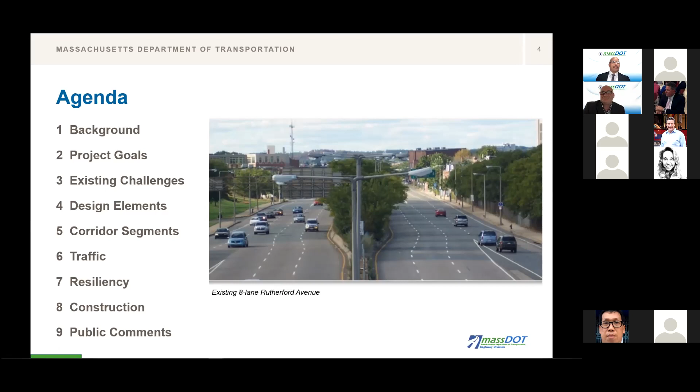The notice of the public hearing appeared in the Charlestown Patriot Bridge on June 11th and 18th, and in the Boston Globe on June 9th and 16th.

The purpose of this public hearing is to provide the public with information about the proposed reconstruction of Rutherford Avenue. The roadway corridor, as some of you may know, is failing, and the corresponding bridges are considered to some degree deficient. Our main concern, and above all, is safety. Significant improvements to the corridor are anticipated once the project has been completed.

The project is currently at the 25% design stage. The project needs to be advanced in order for it not to lose its window of opportunity. The advertisement date for construction procurement is currently in the first quarter of 2023. Construction should take about 4 seasons. The current construction cost is approximately $177 million. In order for us to advertise the project, we need to secure environmental permits and right-of-way before the first quarter of 2023.

80% of the cost will be funded by the Federal Highway Administration. The state of Massachusetts will fund the remaining 20%. And now Craig Sheehan will explain the right-of-way procedure.

Thank you, Alan. When the Commonwealth, acting through its Massachusetts Department of Transportation Highway Division, indicated it would accept this project for funding, your municipality accepted certain responsibilities. One of those responsibilities is acquiring all the necessary rights in private and public lands for the design, construction, and implementation of this project. My function as community compliance officer assigned to the project is to review and recommend procedures that your municipality may use in acquiring these rights. Procedures used must comply with both federal and state regulations.

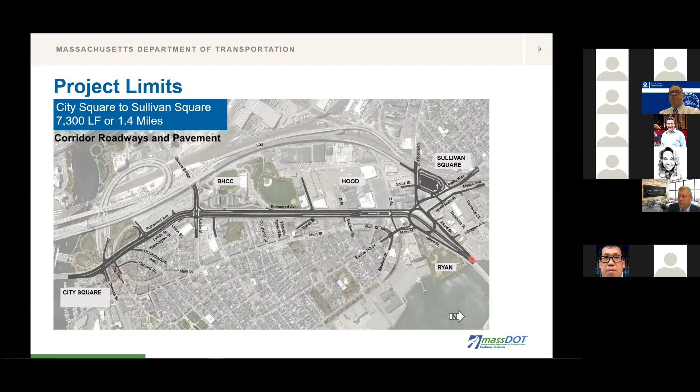So what is it that we want to accomplish? We've been talking about the project goals for years, as Bill has mentioned, and the number one goal is to improve safety for all users. We also want to improve pedestrian, bicycle, and transit mobility, decrease traffic congestion, and try to protect the neighborhood from cut-through traffic.

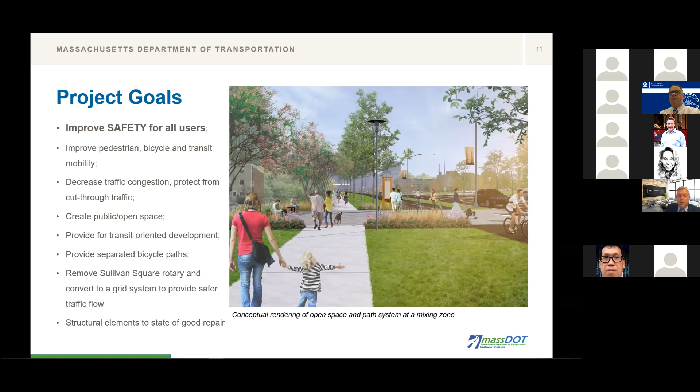Create some open space and transit-oriented development parcels. We're going to be providing separate bicycle paths. And another goal is to remove the Sullivan Square rotary and convert to a more traditional city street grid system. Also for the structural elements, to bring those up to a state of good repair.

Some of the existing challenges on the corridor have been identified through an independent road safety audit for the traffic aspect of the project. This includes things such as traffic congestion and confusing lane designations, poor pavement and sidewalk surface conditions. Signal equipment is old, pedestrian and bicycle accommodations are lacking, high speed of traffic on the corridor, and also transit is poorly supported, as well as lighting and traffic signage.

Before I get into showing you the plan, just to touch upon traffic data a little bit, we collected traffic data back in 2017, and then some supplemental data in 2019 after the casino was opened. We know that during this pandemic period, there's been quite a fluctuation of traffic from 0 and now back to, I guess, 100%. According to the Globe article the other day, traffic is back to its pre-pandemic levels.

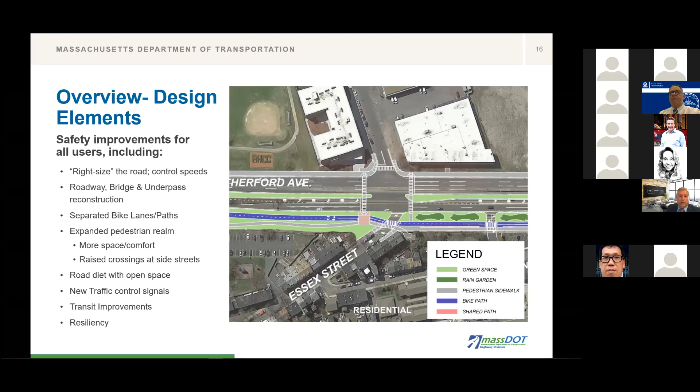Getting into the different corridor segments, I'm going to start down here at City Square. We are matching up to the North Washington Street project, which is currently under construction. As I mentioned, with the traffic volumes, we see that there's less traffic in the northbound direction, so that is where we're taking advantage of that with the overcapacity of lanes that are out there today, and we can implement the road diet on the northbound side.

So where I have my pointer now, this is where we're going to shrink the pavement and implement the separated two-way bike path, separate sidewalks. We're going to raise the intersection at the cross streets and driveways so that they're sidewalk level to make it safer for pedestrians crossing. And also here we've got in red, these are the bus queue jump lanes.

This lane here at City Square extends back to the Tobin Bridge ramp, and that's where the Route 111 MBTA bus comes down into the corridor. So we can add this lane and then match into the lane on the North Washington Street Bridge. With all ramps on this project, such as this one at I-93 southbound, we're going to squeeze the width of the ramp as much as we can so that we can expand the pedestrian space.

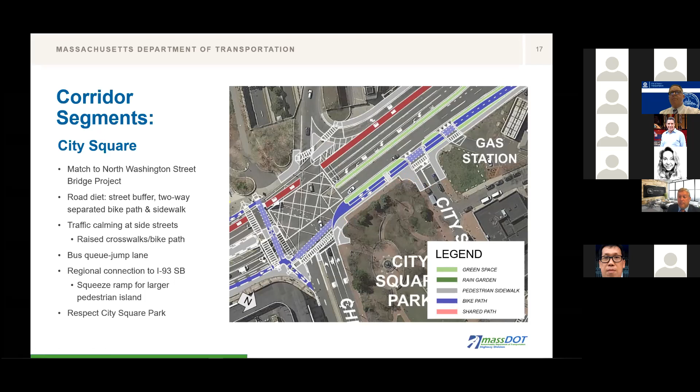Coming up here to the Tobin ramps, we are adding a new crosswalk on the south side here. This is a really nice crosswalk because it can operate with no conflicts from vehicles. So when the off ramp has the green light, pedestrians can cross at the same time, totally protected with no conflicts.

We're adding this bus queue jump lane to the off ramp, which again benefits the Route 111 bus. And then on the northbound side, you can see we continue the road diet northerly with the separated bike lanes and the sidewalk. We might also have an opportunity to make a pedestrian connection to Lynde Street because there's this triangular piece of land owned by the BPDA that they're going to give to Public Works for the project.

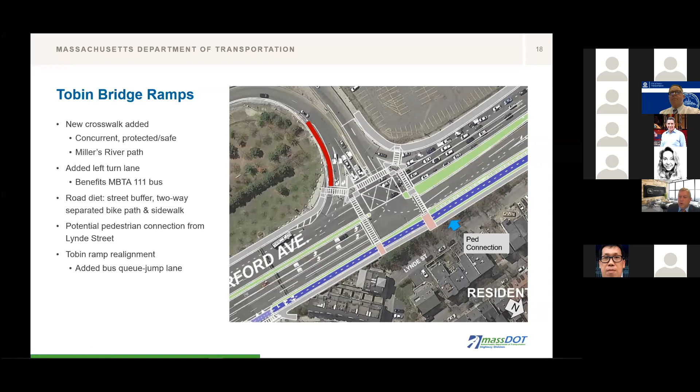Let's move on to the next intersection. Here we have the Austin Street and Gilmore Bridge connection.

What we're doing here is a significant narrowing of the underpass. Today it's a 6-lane underpass, and we're going to narrow it down to just 3 lanes. What we gain is helpful for the pedestrian and bicycle realm. We can shift the whole roadway over and gain nice sidewalk space at the corners of Austin Street for the path system.

This is like a traffic calming element with sharper turns here, so cars make the turns slower. We gain a significant amount of sidewalk space where the pedestrian bridge is today. We're planning for a brand new bridge that's wider, with appropriately lengthed ramps so they meet ADA guidelines - it's not too steep.

As we continue across the intersection, we're going to remove the southbound U-turn and dedicate that space for sidewalk. We're also going to squeeze the ramps as much as we can to increase the pedestrian islands, including on the community college side. One thing we're looking to do when we build the new bridge is have a rampway down to the city sidewalk, so you're not just up on the plaza for the college.

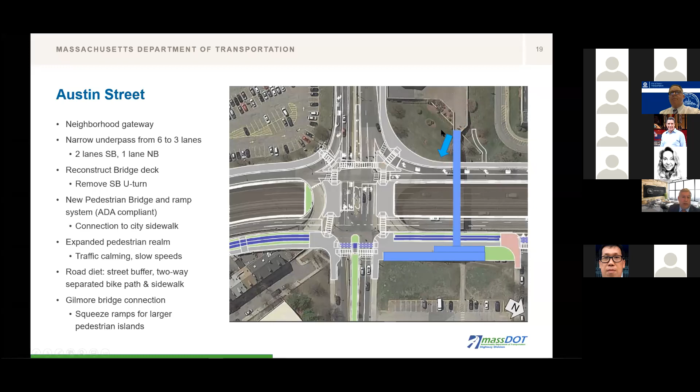Next slide here is at the community college driveway. This is a spot where we're creating a brand new intersection, breaking through the median barrier on Rutherford Ave to create a new full access intersection for the college driveway. We're also gaining crosswalks and safe crossings, actually stitching the neighborhood together so you can cross the road - a huge benefit for people trying to get to the community college.

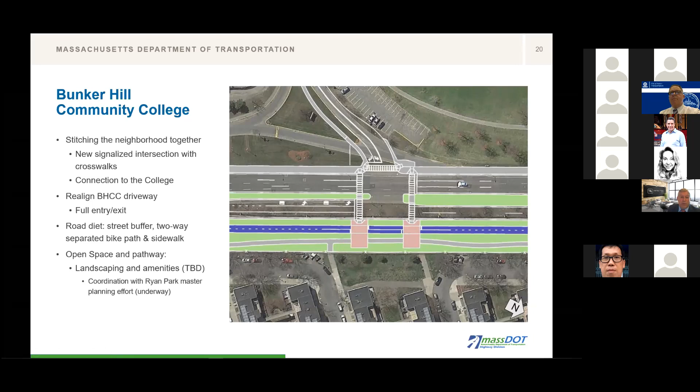We've again got the road diet and the open space that we gain from all the lane narrowing we've done. We're getting about 55 feet of width here, which is really tremendous.

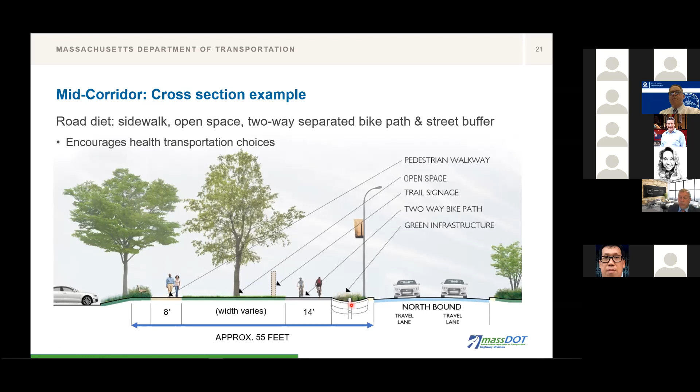That little section of open space is represented here in this cross-sectional diagram. Again, it's about 55 feet wide. We can have a separate sidewalk, open space area, separated bike lanes, and a buffer to the street, which could potentially be bioswales or some green infrastructure.

Moving north of that, we get to Essex Street and the Hood Business Park, where we're again creating 2 new signalized intersections, similar to before, with crosswalks and open space. The total amount of open space from about West School Street northerly to about Baldwin Street is almost 3 acres - we're at 2 3/4 acres of open space. Tremendous benefit there, with the ability to put maybe more green infrastructure in place.

We're going to be doing Boston Water and Sewer work. They have some combined sewer here, so we're separating that, which is a nice health benefit as well. As far as the underpass goes, we are reducing the footprint by about 800 feet in this area. That old section of overhead structure still in place is the portal to get into the underpass, but there's a long sloped section to get down there, so we're going to be shrinking that by 800 feet.

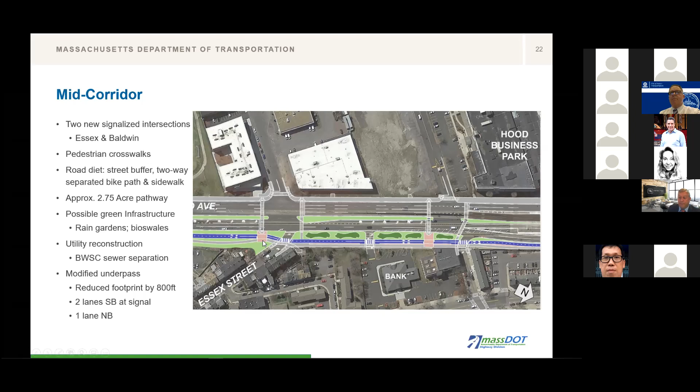Coming up here to Sullivan Square, we are removing the rotary, and what we're showing is a street grid of regular intersections. One thing we're doing from a traffic operations point of view is Rutherford Avenue will be continued and matched up to Maffa Way, so Maffa Way will become a 2-way street. A lot of the traffic on Rutherford Avenue wants to go northbound to Assembly Square to get to the I-93 ramps, so making this a straight through movement takes away a lot of confusion, and we gain a lot of efficiency from a traffic perspective.

When we plan to deck over the underpass, we create this nice open space area, about 1.5 acres, which provides a direct connection from the neighborhood and the Schrafft Center across the old rotary to the T station. That's one of the goals achieved right there - better connectivity.

When we do this, we're also looking to create some transit-oriented development parcels for the future. These were the parking areas that are there today, but when we shift the road over, we adjust where those are located. For the Main Street connection here to the neighborhood, we're actually cutting through a little bit of the MBTA property, so the city's been working on coordinating with the MBTA and acquiring that land.

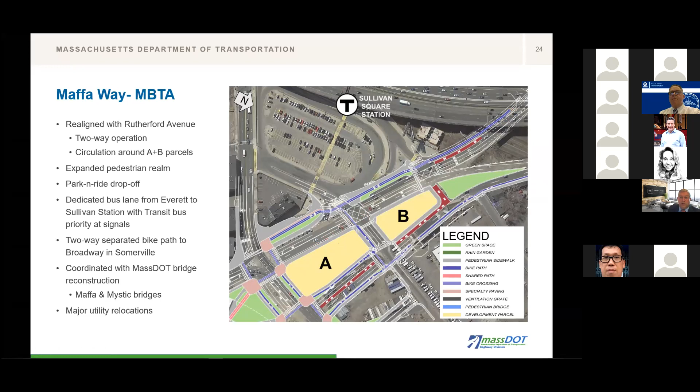In addition, when we discontinue the roadway from the old rotary, we end up with about 3/4 of an acre that we can give back to Ryan Playground. So we have the opportunity to expand Ryan Playground. We're constructing a new driveway exit onto Main Street, as well as the one that's on Alfred Street. And the Parks Department is undergoing a master plan right now for the playground, so they're going to consider this new space, as well as the connectivity to Sullivan Square Park.

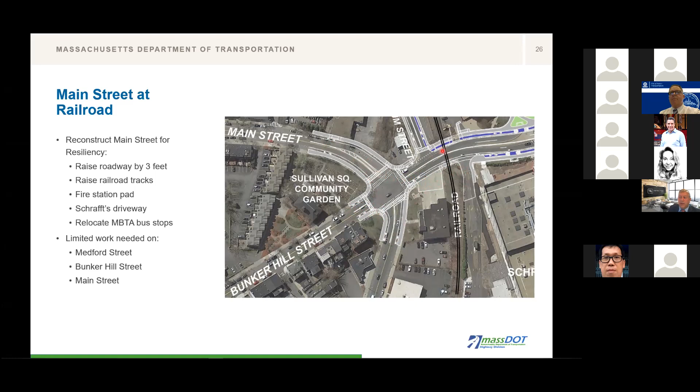So just to recap a little bit for pedestrians and bicycles on all the plans I've been showing: we're going to be rebuilding about 22,000 linear feet of sidewalk, so that's going to be great. We're making 4 new intersections—the 4th one I forgot to mention is Mishawam Street, where we're going to put in a pedestrian crossing. From a bicycle point of view, we're creating over 12,000 linear feet of separated bike path, 6,000 of that is 2-way, and the other is 1-way lanes.

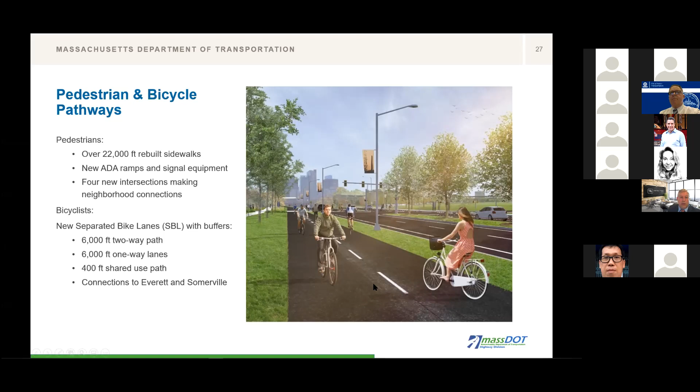Looking a little bit closer at the open space and landscaping opportunities, Sullivan Square Park that I had shown you is about 1.5 acres, approximately the same size as the City Square Park. So we're really bookending this corridor with two very nice parcels of open space. There's also the Hood Business Park making a green space on their parcel, and the Ryan Playground Master Plan is underway. The Parks Department is looking at master planning Ryan Playground and how all these new open spaces will be connected. As Bill mentioned, we're basically creating 5 acres of open space on this project when we do these road diets and deck over the underpass.

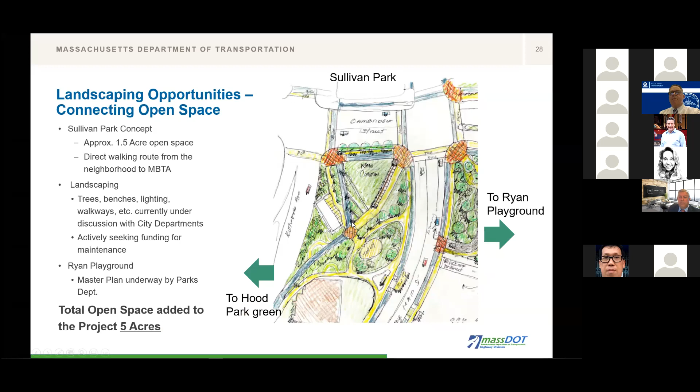Here's a rendering of what the Sullivan Square Park could look like when the underpass is decked over. It's completely hidden. You're going to get some nice green space, hopefully some amenities, maybe some gazebos and whatnot, but that's all to be determined, and we'd like to hear your input on that.

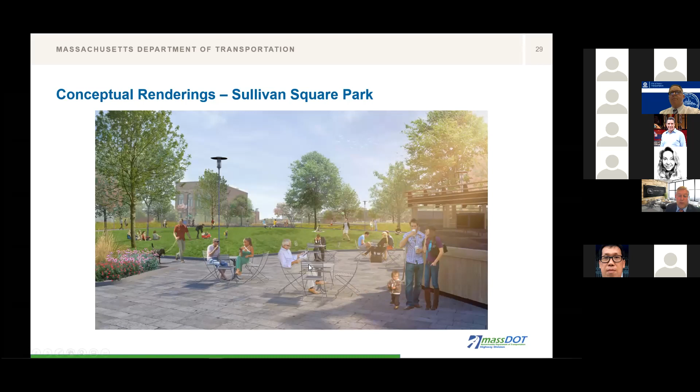Here's another rendering view looking back at the Schrafft Center. At the time we did this concept, we had a bicycle roundabout. I don't think we have that on the plan anymore, but it shows how we are elevating bike mobility with these separated lanes, as well as the pedestrian connections back to the neighborhood. So there's really some substantial expansions to the pedestrian realm.

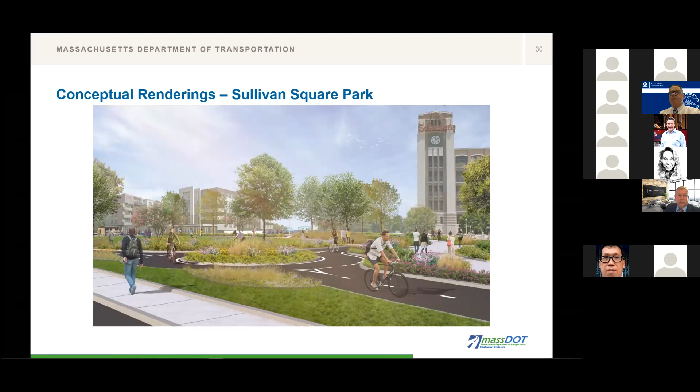The reason for this, of course, is the importance of Sullivan Station. From a neighborhood mobility point of view, you should be able to walk there. There are 12 different bus hubs and bus routes at this hub. There's the Orange Line. We've got ways to get into Somerville, Cambridge, and Everett, as well as Charlestown. So we realize the importance of that, and that's why we've done the road diet and expanded that realm.

Now we're also looking to relocate any bus stops that would get shifted when we shift the road and do the road diet. But we're also looking to future-proof this roadway. We hear a lot of talk now about maybe Silver Line extensions and things like that. We've done extensive coordination with the MBTA, and as you know, there is no bus route on Rutherford Avenue itself right now, but that doesn't mean there won't be in the future. So we're working with MBTA planning staff and City of Boston's active transportation staff to future-proof this corridor by setting aside space for future bus stops.

So what we've heard so far through that coordination is potentially at City Square, up on the Gilmore Bridge near the community college, and then also at the Hood Business Park, maybe near the Baldwin Street area.

From a traffic operations point of view, we've been modeling our future conditions here and the future roadway network, and getting good results. The rotary is confusing, and some of the lane designations are confusing. When we put in that grid of streets and allow Rutherford Avenue to continue northbound to Maffa Way, we take out a lot of the turns in that area. From a modeling and signal coordination point of view, we're getting good results.

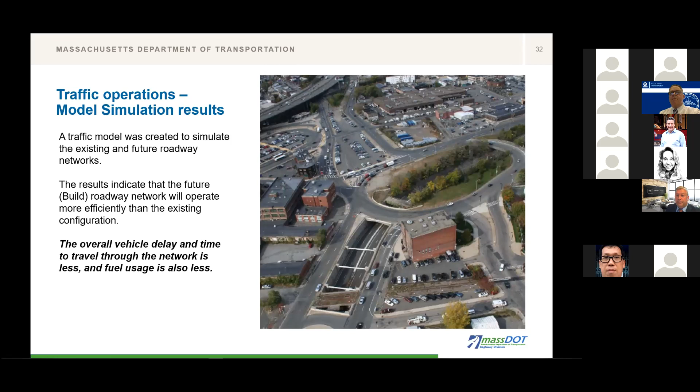So what is the construction approach? This is a big project. We know it's going to take staged construction, about a 4 construction season effort. It's going to start with the major aspects first. So all the time we do underground utility relocations first. Then we get into major things like underpass renovations and decking over the underpass. Then we go into the bridge work, and then finally getting into the road reconstruction, sidewalks, and landscaping. So the staging will take advantage of the fact that we're ultimately ending up with a road diet.

So that space will be used for traffic management so that we can rebuild, let's say, the southbound side first, and then eventually squeeze the road down and take up that pavement that's used for the road diet at the end. We know that construction impacts are very important for mobility for the neighborhood. So we are planning on having many more meetings into the future as the design progresses to keep you on board with what's happening and to help coordinate with the other projects in the area.

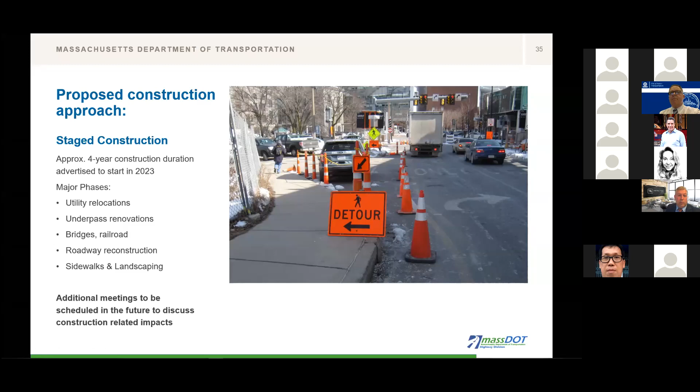So how do we keep you informed? And at this point, I'll turn it back to Alwyn Ramirez. Thank you, Eric. Appreciate it.

And now we're going to turn the presentation over for questions and answers at this point for the hearing. Before we open the hearing to general questions, I would like to provide the opportunity for elected officials to make a statement. If there are any elected officials, please let yourself be known by title, and Nate will call upon you. Nate, do you see any elected officials?

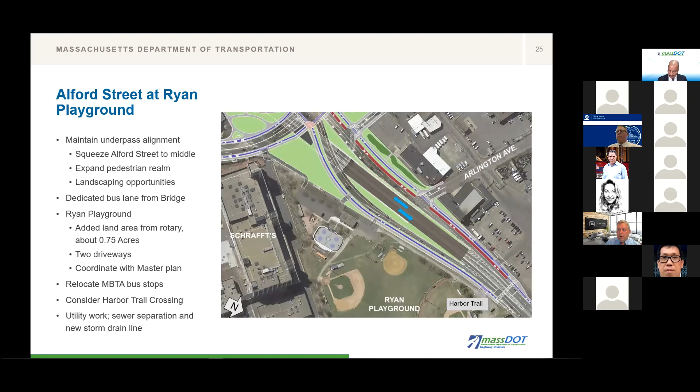I'd have to look at the plan again, but one thing I wanted to, this brings up a good point that I didn't make when I was going over that section of the plan. So I'll bring it back up now. So I've got that on the screen here. And one thing that's nice about what we're doing is the way that we've reconfigured the grid with the underpass in place, is this crossing here from the neighborhood would be concurrent when Rutherford northbound and Maffa Way southbound are operating. And there should be really lower right turn volumes from Rutherford Avenue, because you would be using the underpass. So we're expecting a light turn here. So this crossing becomes very safe.

And then likewise, when you get to the other side of the street, there's no left turn from Cambridge Street at the first intersection because you could make the turn onto Beacham. There is an opportunity to make a turn on Main Street, but with the no left turn here, this crossing is also totally protected when the east-west movement is going.

So we did eliminate the right turn pocket that's on Maffa Way today and narrowed up the road, and again created a nice pedestrian realm. So we think we're really boosting that space.

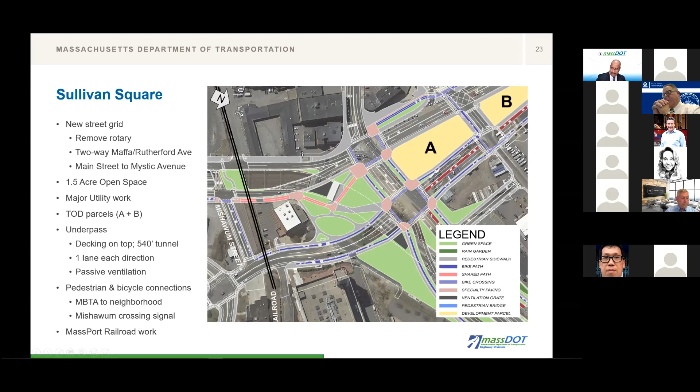I know there was some minor repairs that were done to the fence. In the future, that's the green space that comes along that. We did hear from residents that they still wanted to have that separation there, but I'll kick that to future meetings as we go forward here on what type of barrier or fence we want to see there. There was a lot of talk, I believe, with the Mishawum residents back in the day about young children or others getting outside or getting into the boulevard without supervision. So as we progress along with other meetings, that's something we will get involved with.

Thank you. So Bill, apropos of the earlier comments, there was the concern about young children getting into the boulevard without supervision. Boulevard, correct, yes. Boulevard. Good, all right.

So this one is from Tom Lamar. And I think, Eric, you spoke to this a little bit, that the underpasses are being skinnied up a bit, so they're not going to take all the real estate that they do today. But the question is, how much width does the underpass take up? How much more green space could we create without the underpass taking up space?

Yeah, if we're talking about the Sullivan Square underpass—it doesn't say which one, just says underpass—I'm going to go with that one first, and then I'll go to the other one.

So the Sullivan Square underpass, according to today's highway standards, is slightly deficient because of the curvature there. It doesn't meet sight lines. When you're heading northbound, there's a sight distance issue. If it was operating in the 4 lanes that it is today, you wouldn't see somebody if they were broken down in the right lane. So that's one reason why we're reducing it to just 2 lanes, but we're also keeping breakdown lanes to meet current standards and for sight lines.